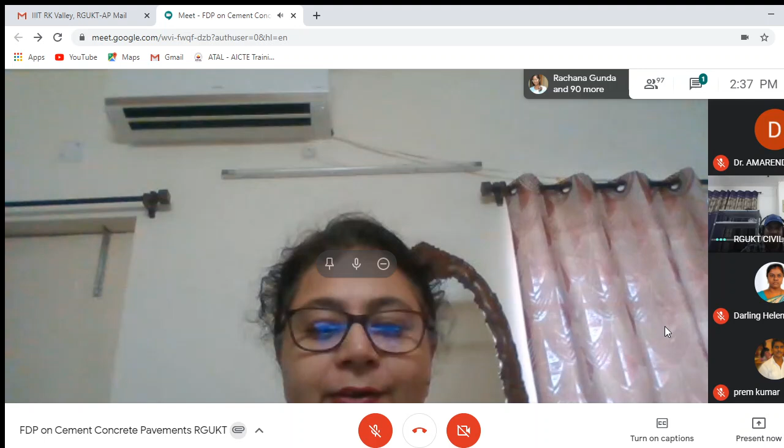Thank you, everybody. First of all, shall I start, Dr. Amarendra? Yes, madam. Okay, first of all, I would like to thank the organizers, Dr. Amarendra and other faculty members here for inviting me to this faculty development program of this institute. I am really thankful to them, and it's my pleasure to interact with them and the other participants. So from my behalf, I welcome all the participants for this session. You have come from different institutes, different backgrounds, so after the lecture, feel free to discuss also. So I will now start my presentation.

Just a moment. Is the screen visible? Is the screen visible? No. Is it visible? Is the screen visible? No, ma'am. Yes, so what is it? Madam, just open your presentation. Just go to present now. Present now, I'm going, right? Then your entire screen, it says. Yes, ma'am, share your screen, ma'am. Okay.

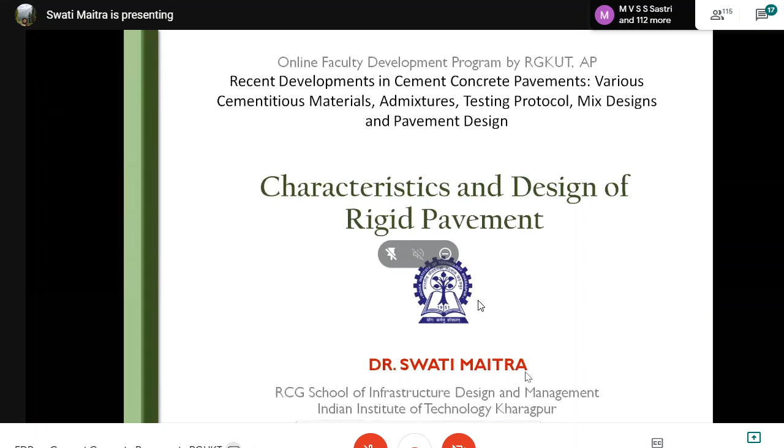Sorry for the delay. So today's topic is characteristics and design of rigid pavement, though I will mainly focus on the characteristics of rigid pavement. And this is just an introduction.

The main component of any road infrastructure is the pavement, and we have bituminous roads and concrete roads. I think this FDP is only on concrete roads, so I'm not going into detail. We can compare construction cost, maintenance cost, durability, and life cycle cost. In recent years there is significant emphasis from the government for the construction of concrete roads in India.

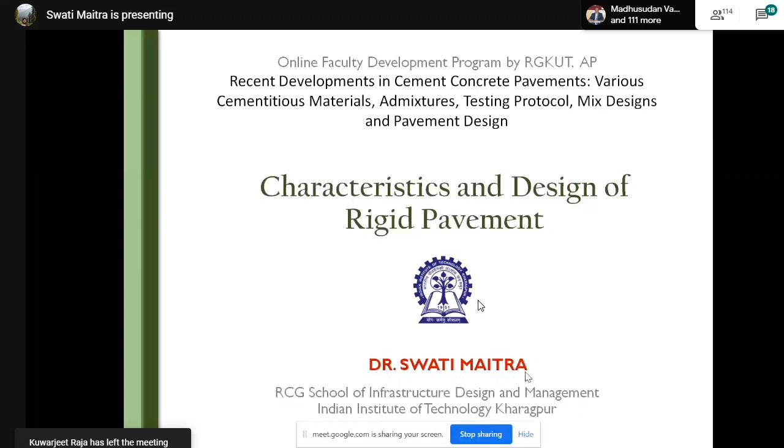We have several types of concrete road: jointed plain concrete pavement, or JPCP as commonly called, and jointed reinforced concrete pavement, though this is not very common, even in India and abroad, becoming less nowadays. In jointed plain concrete pavement, there is normally no reinforcement, and we will discuss those things.

In jointed reinforced concrete pavement, it has reinforcement. Continuously reinforced concrete pavement is another type where we have a continuous, good amount of reinforcement throughout the concrete slab.

Pre-stressed and precast is another type of concrete pavement where you can build the concrete slab in a factory and place it on the site. It could be pre-stressed so that it can take more load, and the thickness requirement is also less.

Roller compacted concrete pavement is also another type of concrete pavement. Cell-filled concrete pavement is normally for low volume roads, village roads, and the like. Pervious concrete pavement is also another type of pavement, comparatively new.

Concrete is generally impervious in nature, but this type of pavement, as the name suggests, can permit water. So for low volume roads or urban areas, this type of concrete pavement can be used. Another type is the concrete overlay or white topping.

This is also coming in a big way nowadays, and this is mainly a rehabilitation measure for existing bituminous roads. So there could be several types of concrete pavement, but the most common type is the jointed plain concrete pavement, used in most of our highways. Our main focus today is on jointed plain concrete pavement.

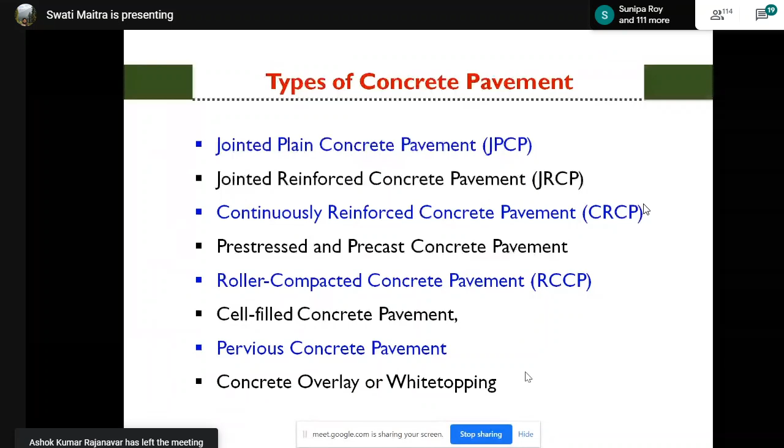Now let us talk about the characteristics of concrete pavement. Concrete pavement is composed mainly of the concrete slab, which has high flexural strength. Concrete is generally a material which can take very high compressive strength, and its tensile strength and flexural strength are comparatively low, but the strength of the concrete slab mainly governs the concrete pavement design.

So it has the concrete slab at the top surface, and below it is the foundation, composed of the base layers, sub-base layers, and compacted subgrade. In concrete pavement, the influence of subgrade is comparatively less than in a bituminous pavement. In a bituminous pavement, it is actually a layered structure, and all layers are responsible for taking up the load, so the thickness also decreases as we go downwards.

In case of concrete pavement, also we have different layers. Is there any problem, Dr. Amarendra?

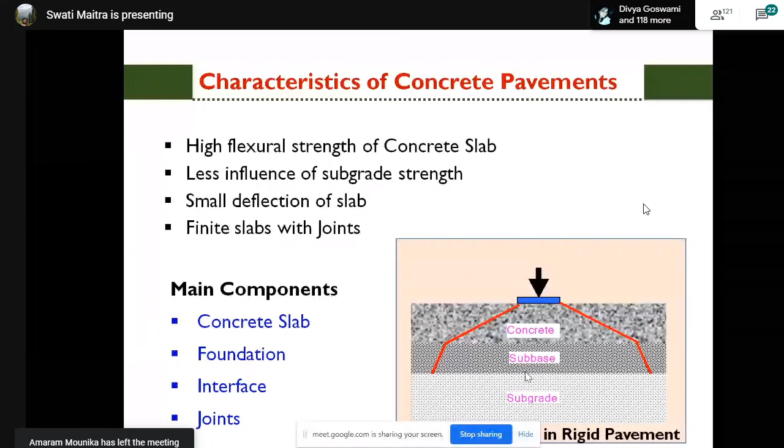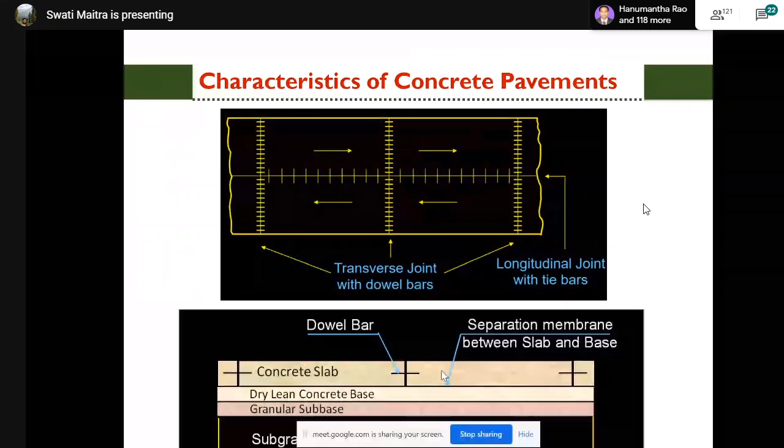This is just a sectional view of the pavement, showing the concrete slab, the dry lean concrete base, the sub base, and the subgrade.

Now, the structural behavior of concrete pavement depends on the traffic characteristics. It also depends on climatic characteristics. The main load coming on the pavement is due to traffic movement. Traffic is the main loading for all types of pavement, so traffic characteristics are an important consideration for the performance and design of the pavement.

Traffic characteristics means not only the load, but also tire pressure, wheel position, wheel distribution, whether it is single axle or tandem axle, and the total load coming on the pavement. All of this matters in developing stresses. The traffic load, or axle load, is the main load coming on the pavement.

Another important factor is temperature variation. Climatic characteristics mainly result from temperature variation and moisture variation. Temperature variation could be daily or seasonal, each having its own effect on the development of stress in the pavement. Moisture variation is also present, but its effect is much less compared to temperature variation. So often in analysis or design, we neglect the effect of moisture, though it has a similar type of effect as temperature.

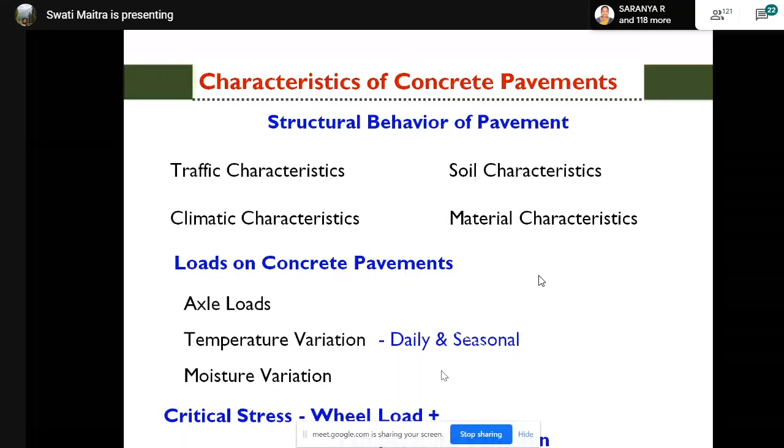Now, jointed plain concrete pavement, as I said, the concrete slab is the main component, main structural component. It is plain cement concrete without any reinforcement, and it is responsible for the load carrying of the pavement.

Foundation is a combination of subgrade, base, and subbase, and the foundation is assumed as Winkler foundation. For all our analysis and calculations, the Winkler foundation model has been assumed, which is a very simplistic model, as suggested by Westergaard, who is considered the father of concrete pavement analysis. From that, we still use Winkler foundation. Of course, in some analysis, elastic foundation also can be used, but Winkler foundation model is still quite popular.

In Winkler foundation, the subgrade strength is expressed by one single parameter called the modulus of subgrade reaction. This parameter can be found out from a plate load test, or it can be correlated from the CBR value. Base and subbase, as I said, are for uniform and firm support for the concrete slab.

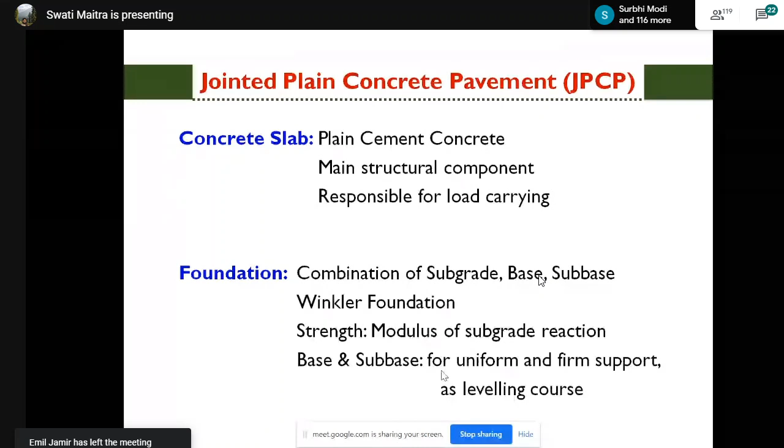Now the interface could be a bonded interface or unbonded interface. Bonded interface means when the concrete slab at the top is cast directly over the base or subbase, we call it a bonded interface. The interface between these two is very rough, and the friction between the two is very high, because the lower layer is, in most cases, dry lean concrete. Even if it is WMM, the friction is quite high if the concrete slab is cast directly over the base.

In case of an unbonded interface, there is a bond breaker in between the concrete slab and the dry lean concrete base. That bond breaker could be an asphalt layer, a very thin asphalt layer, or a polythene sheet, or some other type of polymer material. Generally in India, we use a polythene sheet, a very fine 125 micron polythene sheet, as a bond breaker.

So this interface can also be called a smooth interface. Bonded interface can be termed a rough interface, whereas the unbonded interface can be termed a smooth interface, because it has very low friction.

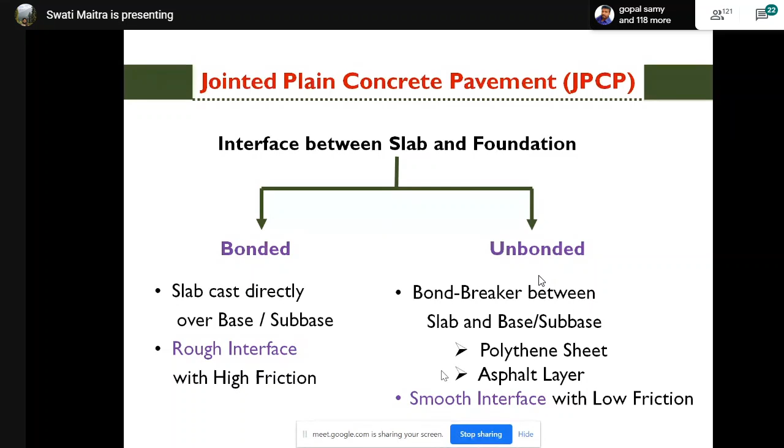Joints are an integral part, and as discussed this morning, there are different types of joints and reasons why they are provided. We'll discuss a little bit here too. In JPCP, we have four types of joints: contraction, construction, expansion, and isolation joints. These joints are provided to control cracking due to shrinkage or thermal contraction, moisture, or thermal variation within the slab. The joints are provided in both the transverse and longitudinal directions of the pavement.

Normally, as we know, concrete is a material whose main ingredients are cement, aggregate, sand, and water. When water is added to the dry mix, hydration of the cement takes place. This cement hydration is an exothermic reaction, so a lot of heat is developed and generated. If we cannot control this, there will be loss of water, and water will evaporate.

Because of that, hydration cannot take place properly. If we control this evaporation of water, then hydration can take place in a proper way, or sometimes we put additional water so it gets sufficient water to hydrate. That is why curing is necessary in all concrete structures. But it is very, very difficult for many structures to control this type of cracking, otherwise shrinkage cracks may occur at random locations, anywhere. So it is very important to control this type of cracking, and proper curing is very much necessary for all concrete structures.

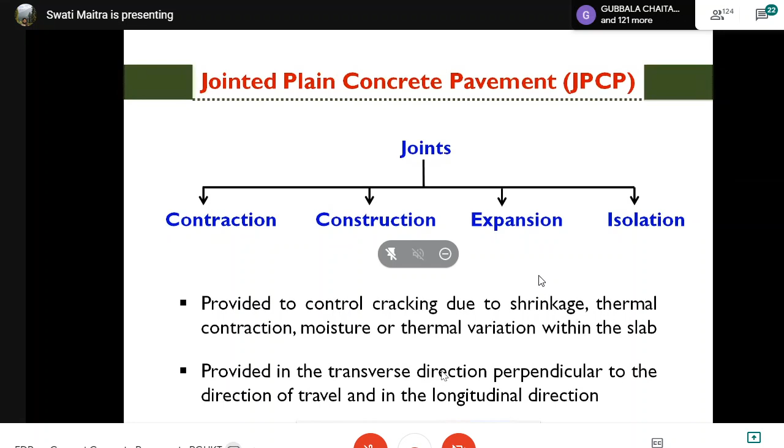So we have contraction joints, to allow cracks due to thermal contraction. We also have construction joints, to separate successive construction activities.

These construction joints - suppose we are constructing the pavement and after some time we have to stop the work, say a day's work is over, so we have to stop it. There we need to provide a full depth construction joint, and we have to provide dowel bars there.

So construction joints are provided to separate the successive construction activities, and expansion joints are provided to permit the thermal expansion of the slab without damaging the adjacent slabs or structure. Expansion joints are not provided in India in concrete pavement, but they are provided near the structures. So that needs to be provided.

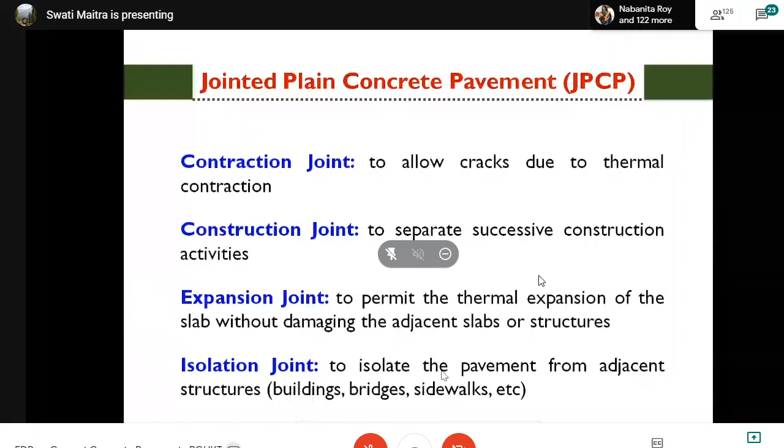Isolation joints or expansion joints are provided only adjacent to the structures. But contraction joints and construction joints have to be provided. These expansion or isolation joints need to be provided when there is an adjacent structure, so for that you have to provide these two types of joints.

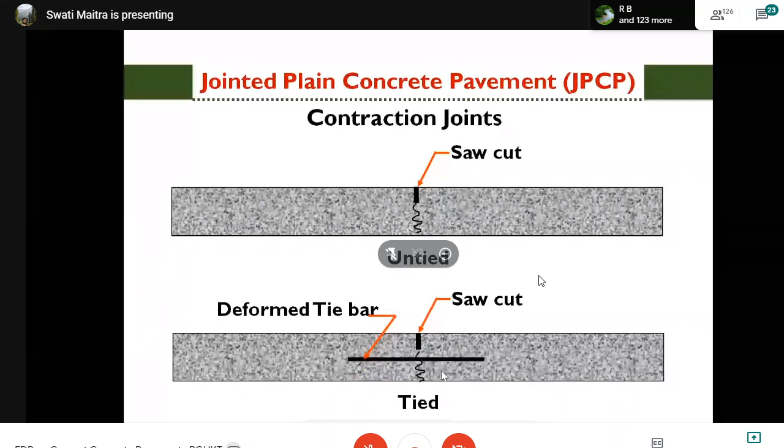In case of longitudinal joint, similar thing - here also we cut it along the length of the pavement, same 1/3 to 1/4 of the slab depth, and we provide tie bars. Of course, the diameter of the tie bars is much less as compared to dowel bars, because the function of the two bars is different.

Dowel bars are provided to transfer the load from one slab to the other slab. However, the function of the tie bar is not that - tie bars are provided to hold the two slabs in their positions, not for load transferring. Here you can see the schematic diagram of the tie bar at the longitudinal joint of the pavement.

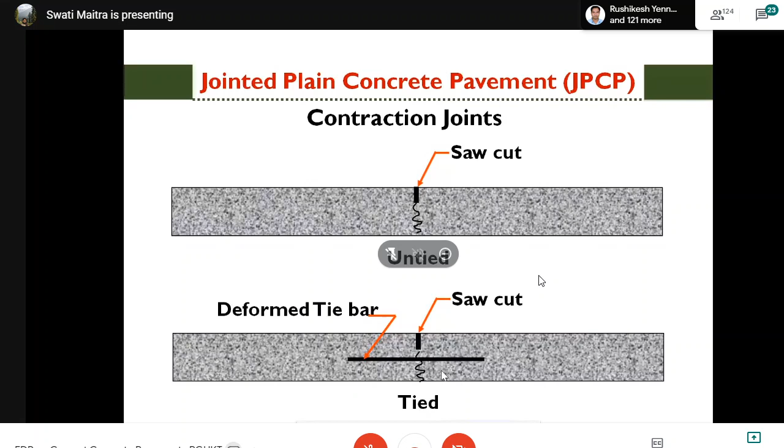After the pavement is constructed, the grooves are cut, and this has to be done within 18 to 24 hours of the pavement, otherwise shrinkage cracks may occur. So this is also very important - we have to cut the grooves with proper depth and within a stipulated time, that means within 24 hours.

Many cases have found that because of late saw cutting, cracks have occurred on the pavement, followed by other distresses. We have seen also in NH 60 that after the groove cutting, when we open that side of the pavement or remove the shoulder portion, cracks have been found below the saw cut location.

So this is good, otherwise it may occur at any other location. We want the cracks to occur only at the saw cut locations - this is the contraction joint created below the saw cut of the pavement.

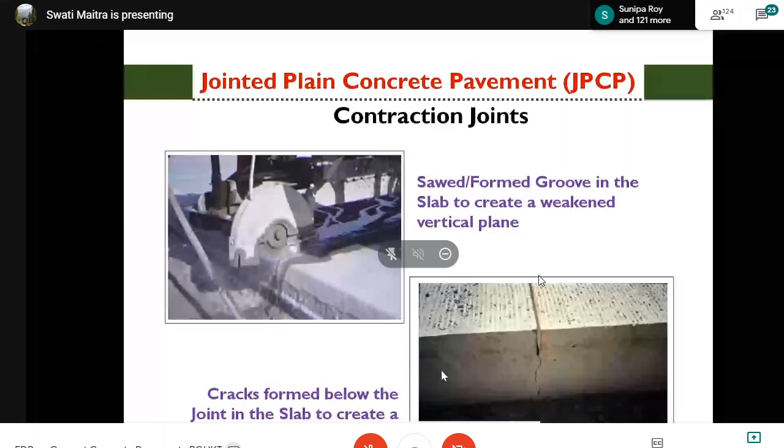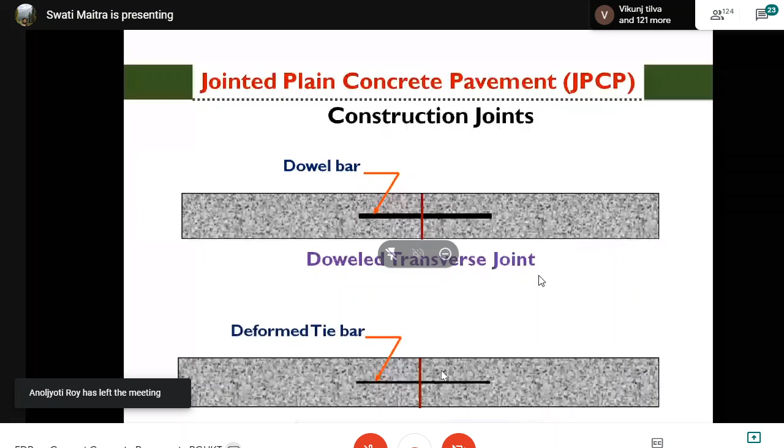Now this is just a picture of dowel bars and tie bars in a construction joint. You can see here, this is a construction joint, and these are full depth construction joints, and dowel bars are there. The diameter of dowel bars are also larger compared to tie bars. Generally, dowel bars are in the range of 32 to 36 millimeter diameter, and tie bars are 12 or 16 millimeter, so a lot of difference based on their purpose. Dowel bars are for load transfer, while tie bars are just to hold the slabs.

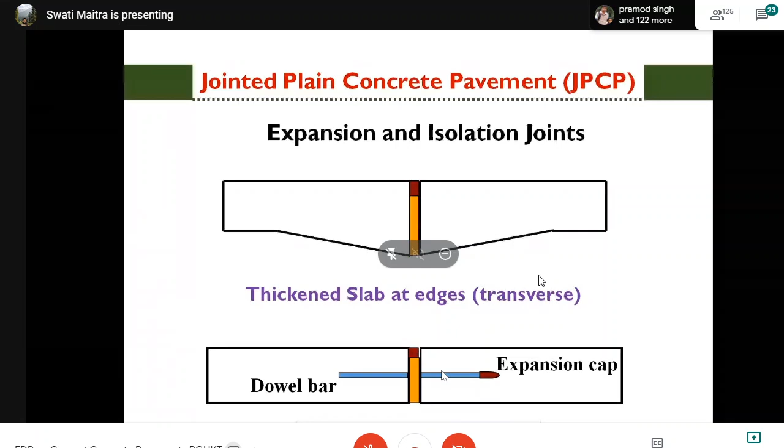This is expansion or isolation joint. This is also full depth, and has a wider gap in between. You can see that sometimes the edge is also thickened, to avoid damage at the edges. So this is the expansion joint and isolation joint in JPCP.

Now, as I said, load transfer is a very important component in jointed plain concrete pavement, because it is not a continuous structure. The slabs are formed because of these joints in the transverse and longitudinal directions, so load has to transfer from one slab to the other. How well the load is transferred actually governs the performance of the pavement. It is very important that the load applied on the slab is shared by the adjacent slab, and this gives the performance of the pavement.

If the load transfer is poor, then a lot of distresses may happen - faulting type of distress, pumping, erosion, corner breaks. I will show you some pictures of several distresses that occur if the joint is not properly constructed, not properly sealed, or the load transfer is not proper. There could be many reasons for distresses, so I won't cover those, but I will show pictures of how joint-related distresses occur in JPCP.

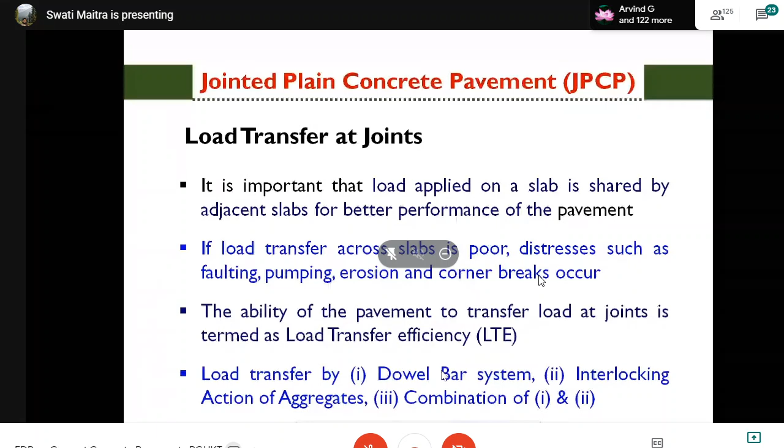The performance of the pavement is expressed by a parameter called load transfer efficiency. Load transfer efficiency is the ability of the pavement slab to transfer the load from one panel to its adjacent panel. This load transfer is done mainly by two mechanisms: one is the dowel bar system, another is the aggregate interlocking system, and in some cases it is a combination of the two.

Load transfer is very important to transfer the applied load from one panel to the other panel. This load transfer is expressed in percentage and can be measured by measuring the deflection of the loaded slab and the deflection of the unloaded slab. So load transfer efficiency is actually the ratio of the deflection of the unloaded slab to the deflection of the loaded slab, expressed as a percentage. If the unloaded slab deflects equally with the loaded slab, then the load transfer efficiency is 100%, which is the ideal case.

But this is an ideal, theoretical case - it cannot happen in practice. When the unloaded slab deflects very near to the loaded slab, the load transfer efficiency becomes high. So it is the purpose of the designer or construction people that the load transfer efficiency should be very high, because that governs the performance of the pavement.

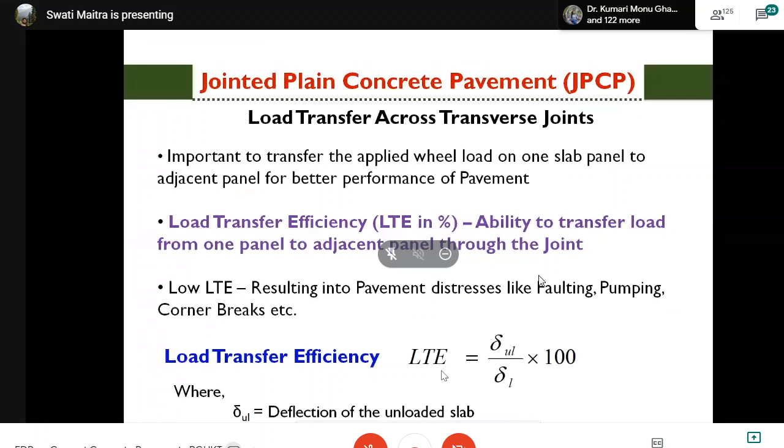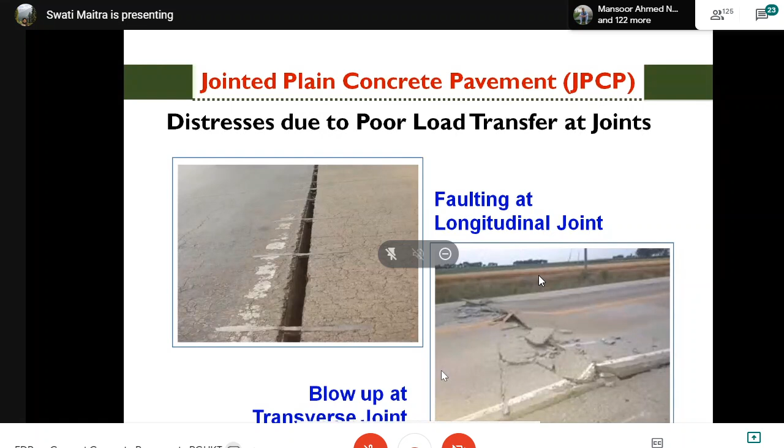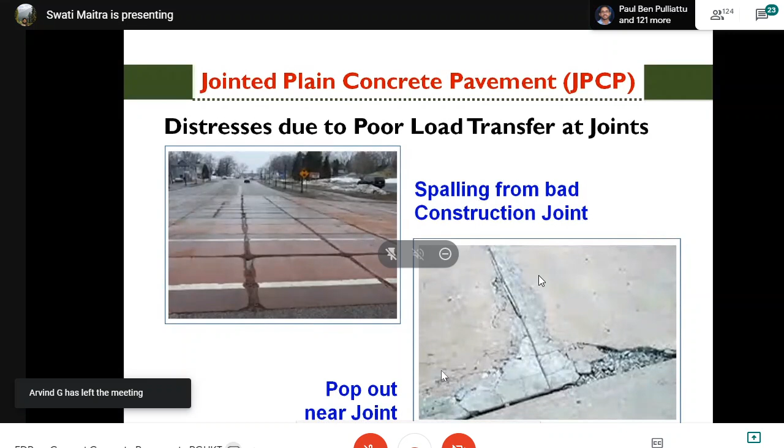These occur in jointed plain concrete pavement if the joints are not properly constructed, treated and maintained. So joints, particularly in JPCP, need to be sealed also, so that water, other materials and dust particles should not go inside and damage the underlying layers. If that happens, it may damage the subgrade, cause erosion, cause voids below the slab, or damage the base and sub-base layers. So it is very important to maintain the joints, and often joints are found to be the main distress areas in case of JPCP if not properly constructed or maintained.

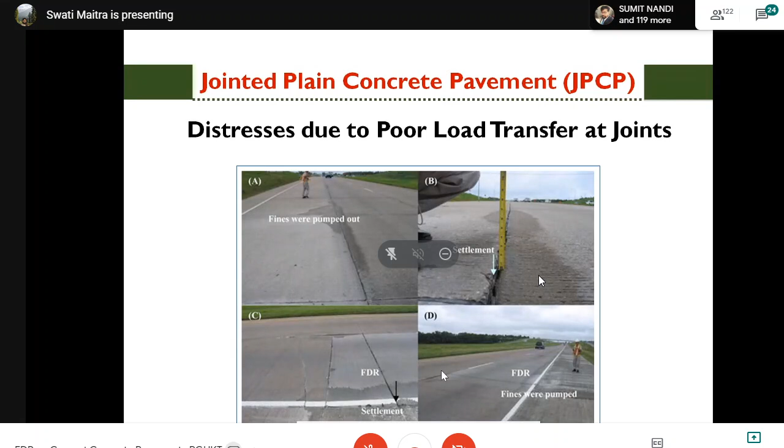Proper sealant also needs to be provided just after construction, both in the transverse joint as well as in the longitudinal joint. So proper sealants need to be provided in JPCP joints.

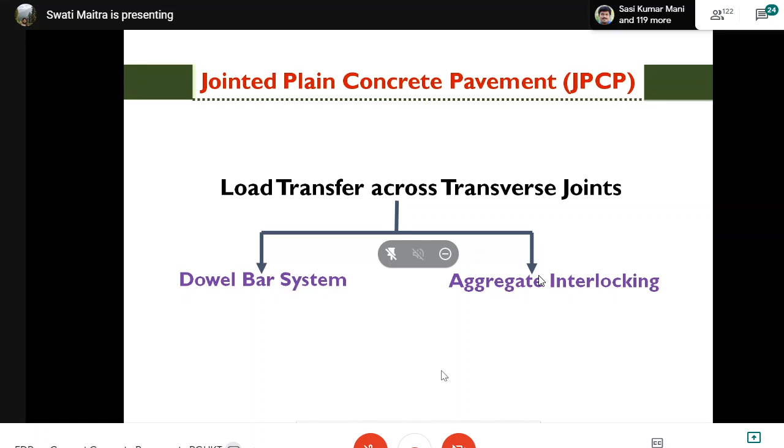Now we will discuss the load transfer mechanism. Load transfer across transverse joints, as I have told, is due to the dowel bar system and aggregate interlocking system, or it could be a combination of the two. In case of the dowel bar system, dowel bars are actually mild steel bars provided mainly for load transfer from one panel to the adjacent panel. They connect the two panels at the mid depth of the slab. Dowel bars have to be provided when the pavement is subjected to high traffic volume, and comparatively the joint spacing is longer. So for all those cases, dowel bars have to be provided in the joint.

Dowel bars allow the adjacent slab to expand or contract also, because in those joints, one side of the dowel bar is provided with some grease or plastic cover, so that it can take care of the expansion. It provides good riding quality by preventing the faulting. If dowel bars are not provided, then only the loaded slab will deflect, the other one will not. So as a user, you will experience a jar from the movement. When functioning properly, dowel bars enable good riding quality also to the users.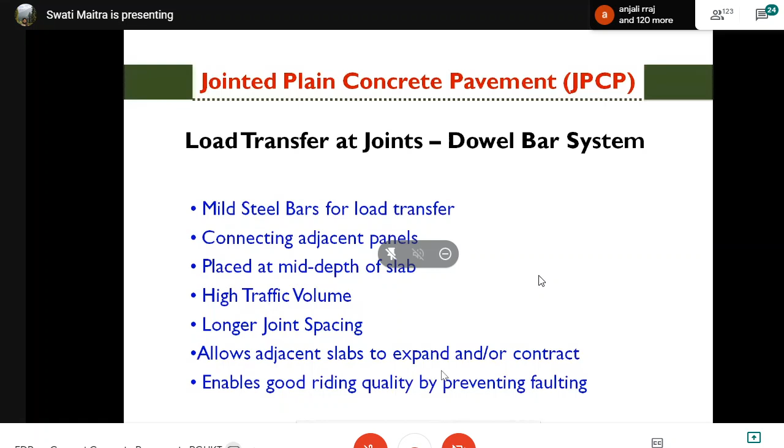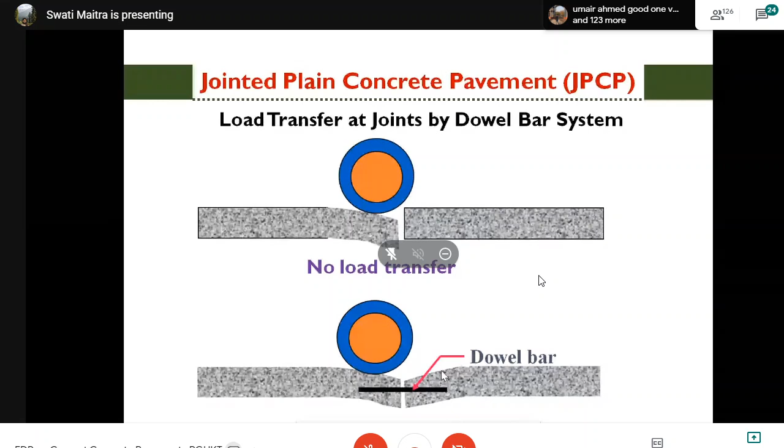Now, on what factors does the performance of the dowel joint depend? The dowel joint parameters depend on these factors: the diameter of the dowel, and the embedded length of dowel. Some portion of the dowel, half, is on the left-sided slab, and another half on the right-sided slab.

So the total embedded length matters for the performance of the dowel. The spacing of dowel also matters, because the dowels are placed at a regular interval across the transverse joint to take up the load. So spacing, diameter, and embedded length of the dowel are important parameters for load transfer. Another parameter is modulus of dowel support, which I will tell a little later, in the next slide.

Modulus of dowel support and dowel looseness are important parameters, which I will discuss in detail. Joint opening also matters in case of dowel joints - it may not be very significant, but still matters. And of course, the properties of the material - properties of steel, since dowel bars are made of steel - properties of concrete, which is the slab, and the strength of subgrade. All these parameters influence the load transfer from one panel to the other panel. So when we go for design or analysis, we will see that the load transfer efficiency depends on all these parameters.

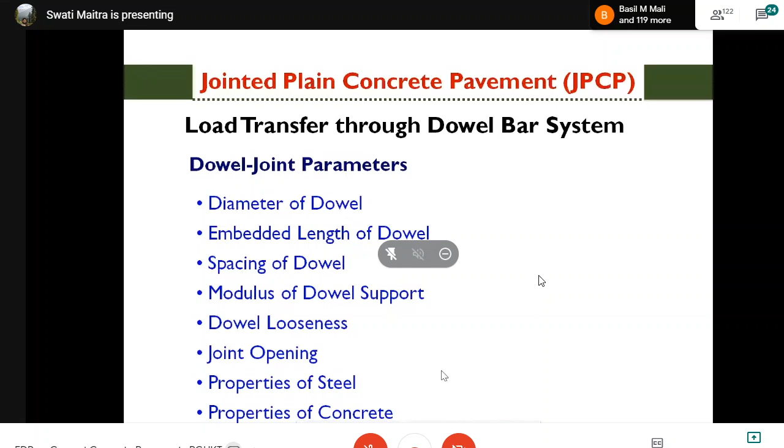Now, what is modulus of dowel support? It is an interaction between dowel and concrete. It's a hypothetical term, but it represents the interaction between dowel and the concrete, since the dowel bars are embedded into the concrete, so the interaction between the two is very important. That is represented by this parameter, modulus of dowel support. A high modulus value indicates a very good contact between the surrounding concrete and steel.

So when the modulus value increases, load transfer efficiency also increases. For our analysis purpose, we have the K value ranging from 80 to 600, which can also be determined from experiment. So this is called modulus of dowel support.

Relative stiffness of dowel embedded into concrete is another parameter, expressed by the term beta. So beta is called relative stiffness of dowel, and all these parameters represent the load transfer due to the dowel bar system. Beta depends on the modulus of dowel support, D is the diameter of the dowel, and E and I are the elastic modulus and moment of inertia of the dowel bar respectively. So this is the relative stiffness of the dowel.

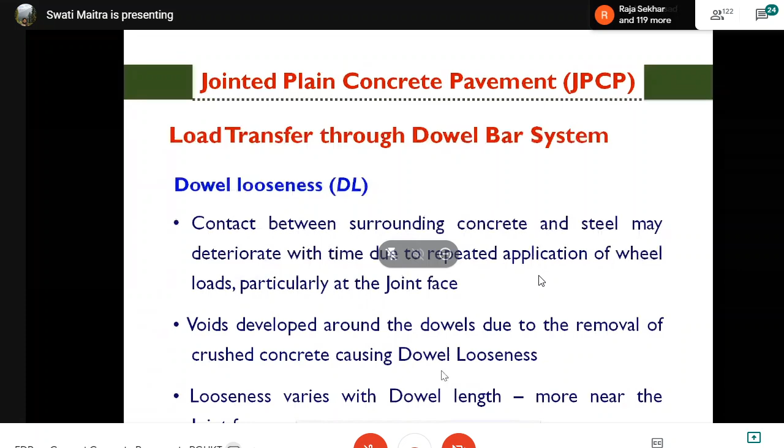Okay, so we have done some modeling. Also, during my PhD work, I have done a lot of modeling on concrete pavement, and all these main components of the concrete pavement were modeled, like the interface, the dowel joint, and the aggregate interlock joint. I will just very quickly show those things as well.

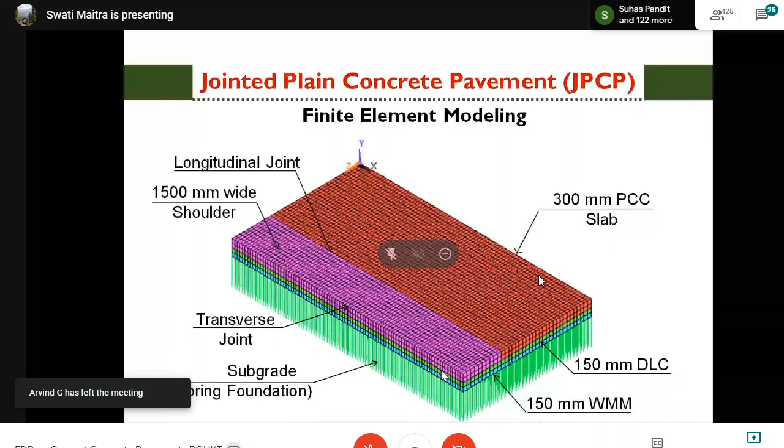So in the finite element modeling, the main components of the JPCP are the concrete slab and the foundation, and the foundation is composed of the base and granular subbase, while the subgrade is the Winkler foundation. The subgrade was modeled as Winkler foundation, and base and subbase were modeled as elastic material using solid brick elements. The concrete slab was also modeled as a solid brick element with linear elastic, isotropic properties.

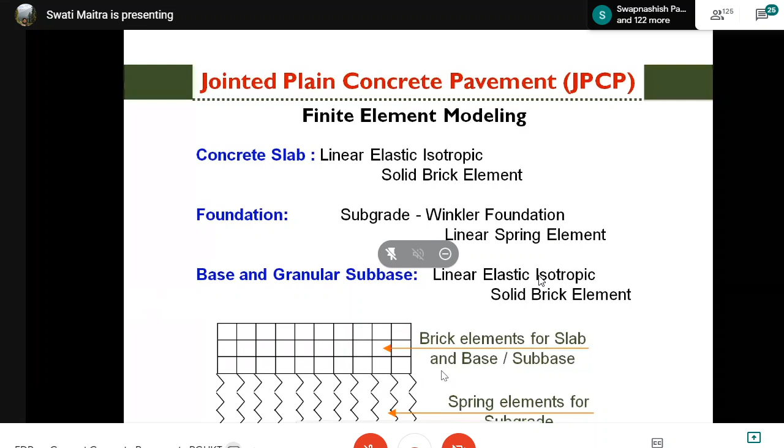So that gap may vary. It may be 0, or it may not be 0, but it may be a few millimeters, and that matters a lot. So this is the gap around the dowel, and that is actually the dowel looseness.

So the beam elements are connected with the concrete slab of the brick element by the contact elements. With this contact element, it was possible to take care of the modulus of dowel support and the dowel looseness. All those things were taken care of by these contact elements, and this was modeled here.

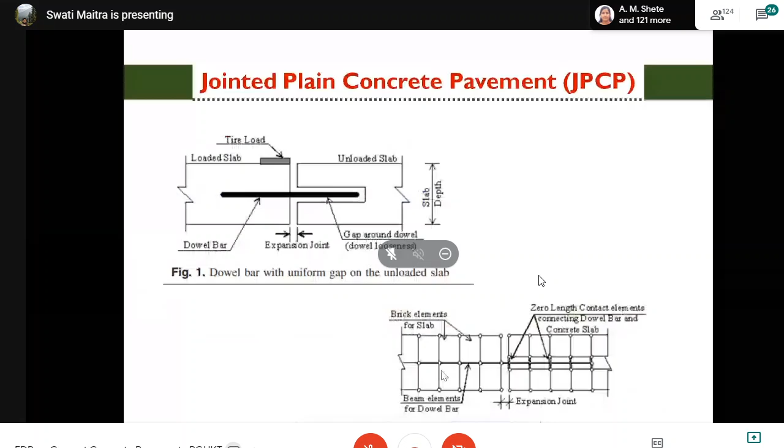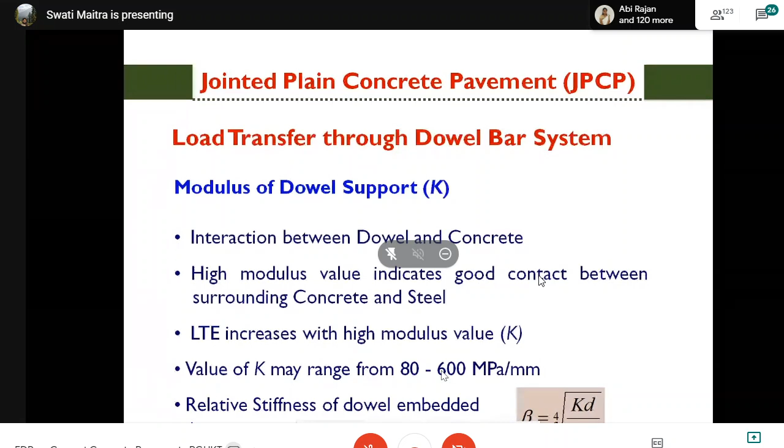So load transfer efficiency depends on all these parameters. Beta also depends on this K value. You can see here that this is the modulus of the dowel support, the diameter, the elastic properties of the steel, and the moment of inertia, that is the area or the cross section.

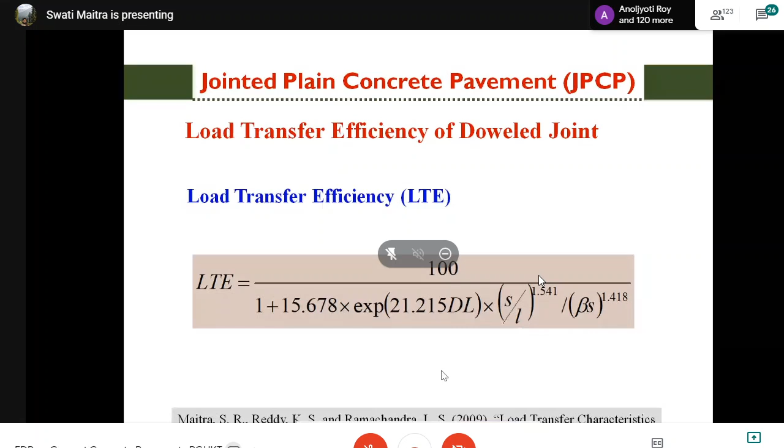So it depends on the dowel parameters. It depends also on the radius of relative stiffness, which takes care of the pavement geometry and the subgrade strength. It depends on the dowel looseness. So all these parameters influence the load transfer efficiency of the dowel joint.

So there are a lot of other things, but let us go to load transfer at joints due to aggregate interlocking. Aggregate interlocking joints are provided when the traffic volume is relatively less, and the joint spacing is also relatively less as compared to high volume concrete roads. So when traffic volume is less, we can avoid dowel bars, and load transfer can be done through aggregate interlocking.

This aggregate interlocking mechanism transfers load due to the interlocking action of the aggregate particles. As shown in earlier slides, we cut the slab at one-third depth, and below that cracks are formed. These cracks help in transferring loads, forming the aggregate interlock joint. The load is transferred from one panel to another due to the interlocking action of the aggregates, so these cracks are joints with irregular faces.

In many cases, particularly in longitudinal joints, we provide tie bars not for transferring the load, but to ensure that the cracks remain tight so aggregate interlocking and load transfer can be done. So tie bars are not for load transferring, but in many cases tie bars are provided so that it ensures load transfer through the aggregate interlocking system.

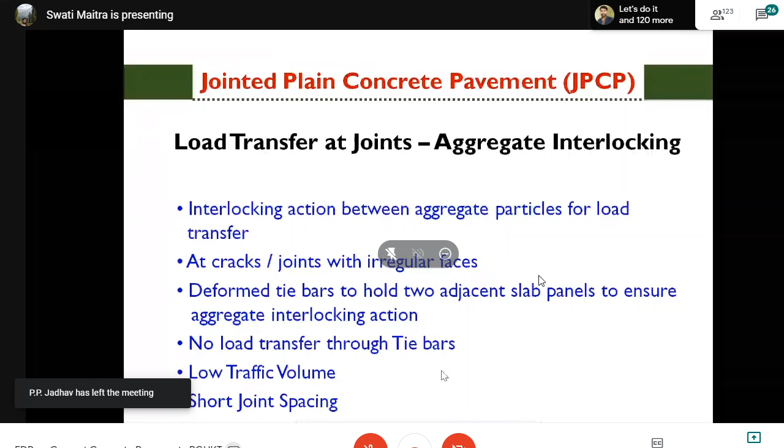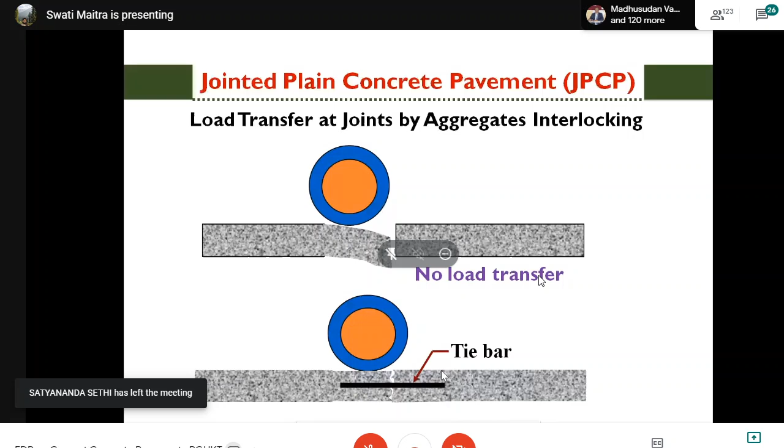So here also, in a similar way, tie bars are provided to help in interlocking action, not for load transfer, but for tying the two slabs in their position so that load transfer can take place through interlocking action.

Now the parameters responsible for aggregate interlocking load transfer are many. One is joint opening, size and angularity of the aggregates, and strength of aggregate, since it is through aggregate only. So aggregate properties are very important, particularly size. If it is very smooth, round aggregate, the load transfer will be less. So size and angularity of the aggregates matter, and strength of aggregate matters too—very soft aggregate will not provide good load transfer.

Joint opening is the most critical parameter—if the joint opening becomes larger, load transfer will drastically reduce. Distribution of aggregate within the cement paste also matters, as it is aggregate interlocking, so all aggregate properties are responsible. Thickness of the concrete slab is also important; if the slab is very thin, it will not get sufficient area at the surface for load transfer, so thickness matters too.

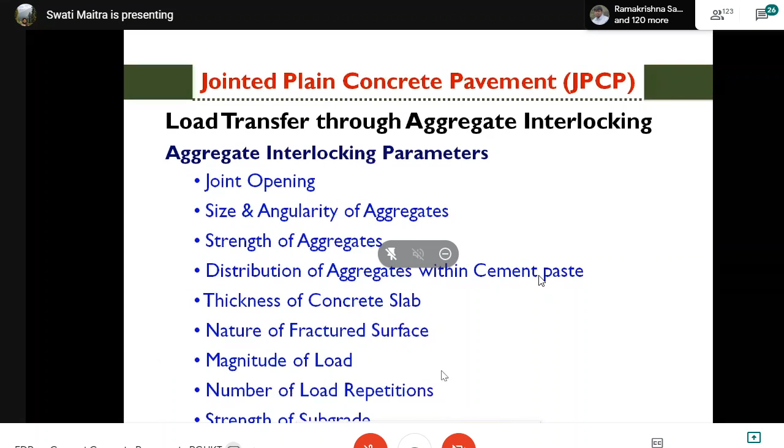Nature of the fractured surface matters—a smooth interface will not provide good aggregate interlocking load transfer, so the roughness of the surface matters a lot. It also depends on the load and strength of subgrade. So these are the parameters: aggregate related parameters like maximum size, angularity, strength of aggregates, and the joint opening or crack width, are very important for the aggregate interlocking load transfer mechanism, along with roughness and other things.

So the mechanism is that irregular faces of crack or joint come in contact, and the interlocking action of aggregate particles helps in transferring the load from one side to the other. Load is transferred by shear spring action, and this is also represented in finite element representation. The aggregate interlocking can be represented by a spring action, as if there are many springs at the edge, represented as a series of springs, like in modulus of subgrade reaction.

So here also you can resemble it as a series of springs. The spring stiffness depends on the nature of the cracked surface—how rough it is—and slab thickness, because you need the bearing area. The nature of the cracked surface depends on the maximum aggregate size, the crack width, the roughness, and the time of crack. Time of crack is also important, because if the crack is formed at a very late stage, the crack width will be more, and there will be a lot of other implications.

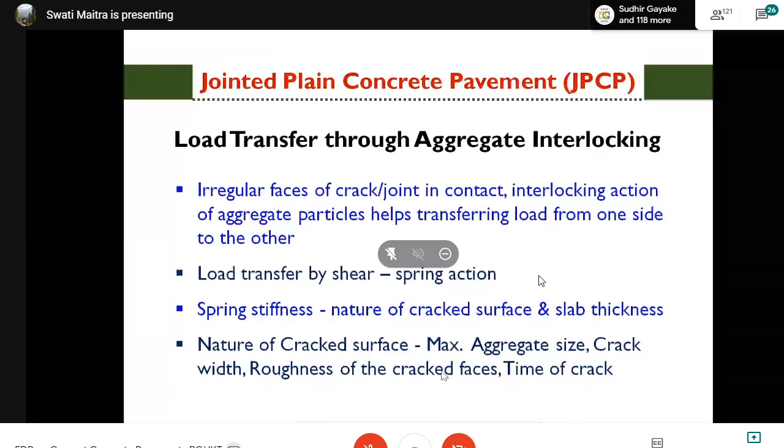With modeling and a lot of other analysis, I have developed a new parameter, modulus of interlocking joint, to represent the strength of the fractured surface. This parameter is a function of the crack width and the maximum aggregate size, which are the two most important parameters for aggregate interlocking load transfer mechanism, as I told earlier.

So these are the two very important parameters, and the strength of the fractured surface depends on these two parameters. Based on that, an expression or a parameter was introduced, modulus of interlocking joint, similar to modulus of subgrade reaction. In this, X is the crack width, and IR is the interlocking ratio which I have introduced, which is the maximum aggregate size divided by the crack width. So this is the expression for that.

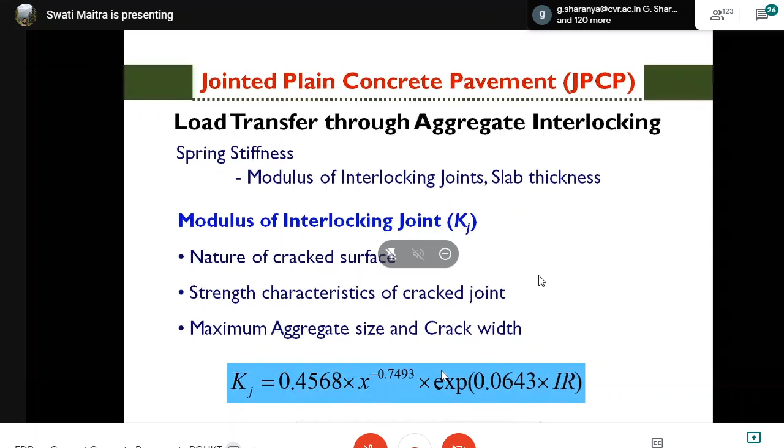Now, this aggregate interlocking, since there is no additional dowel bar or any other mechanism, this load transfer efficiency over a period of time may reduce. Even in dowel bar system also it may reduce due to dowel looseness and other factors. So here also, aggregate interlocking load transfer mechanism efficiency may reduce over time.

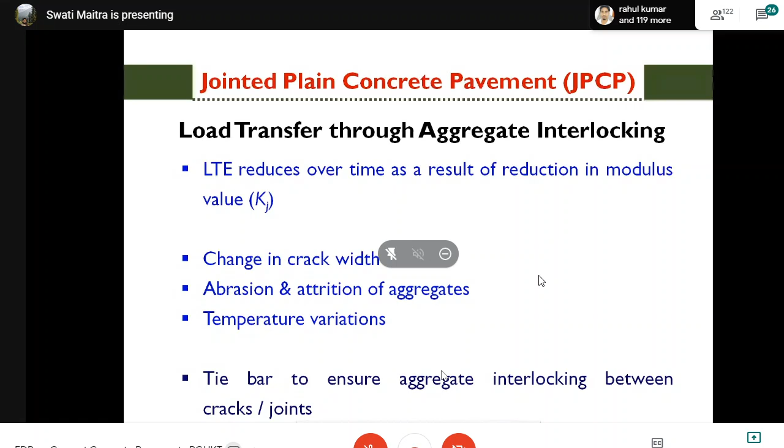What are the factors for that? Change in crack width — initially the crack width is very small, so very good in load transfer. But over a period of time, the crack width may increase, so load transfer efficiency may reduce. Abrasion and attrition of aggregates, temperature variation — all these factors may be responsible for reducing load transfer efficiency of the joint.

So let us discuss about the effect of temperature on concrete pavement.

So this is all about, for the moment, dowel bar system and aggregate interlocking. But there are many more things, many studies have been done also by us, and I will just give a very quick overview of the mechanism of dowel bar system and aggregate interlocking system load transfer mechanism. Now I will go to the effect of interface in jointed plain concrete pavement, which is also a very important component, as I said earlier, particularly to take care of the temperature effect.

So temperature effect is twofold in case of JPCP. One is the daily variation of temperature, another is the seasonal variation of temperature. In daily variation, particularly in daytime or nighttime, this daily variation of temperature effect is seen. In daytime, the top temperature is more as compared to the bottom temperature.

So there is a tendency of the slab to curl downward, that means the middle portion goes up and the sides are at the lower level. While in nighttime, when the top temperature is less as compared to the bottom temperature, the slab curls upwards — the sides go up, whereas the middle portion is at the bottom. So this is the curling effect.

So if there is no restraint, this type of thing may happen. But in practice, do we see this? No, we do not see it, because these curling effects are actually restrained due to many factors. One is the foundation, the adjacent slabs, the dowel bars — so all these are restraining factors, along with the self-weight of the slab.

So all these things actually restrain this curling. If it is free to move, then there will be no stress. But because of all these restraints, the slabs cannot curl that much up or down, so stresses are developed. These stresses we call curling stress.

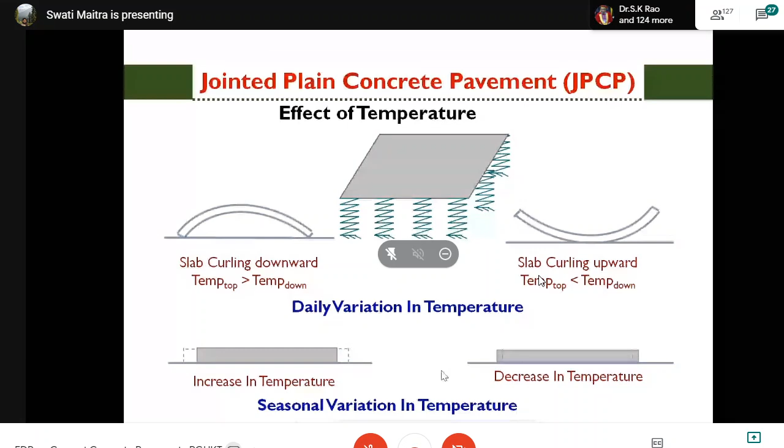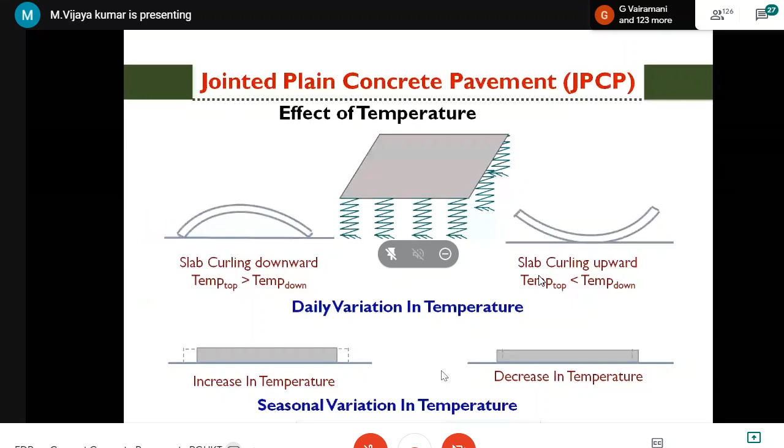And another effect is the seasonal variation of temperature. In summertime, due to increase in temperature, the slab tends to expand, and that is why these contraction joints or expansion joints are there to take care of these things. While in wintertime it tends to decrease — there is a decrease in temperature, so there is a tendency of the slab to contract. So the joints are provided to take care of these thermal effects. This is the seasonal variation of temperature effect on the concrete slab.

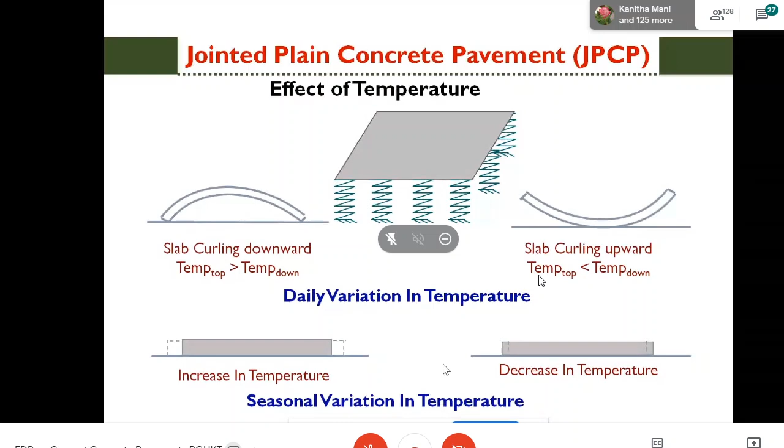As I said, the interface between slab and foundation plays a big role in taking up this temperature effect. This interface is of two types: bonded and unbonded interface. When the slab is cast directly over the base, it is bonded interface, and the friction between the two layers is very high. In an unbonded interface, there is a bond breaker, and the friction between the two layers is reduced. So this is to take care of the temperature effect.

I will tell all this a little later also. Now, we have done finite element modeling of the interface behavior, where the interface was modeled with contact elements between the concrete slab and the base. These contact elements, when there is tension, there is loss of contact, meaning it can take up the curling effect. When the slab tends to curl up or down under high tension, these contact elements represent the loss of contact. Normally in compression there is contact in between, but when there is tension, there is loss of contact. So this takes care of the curling effect.

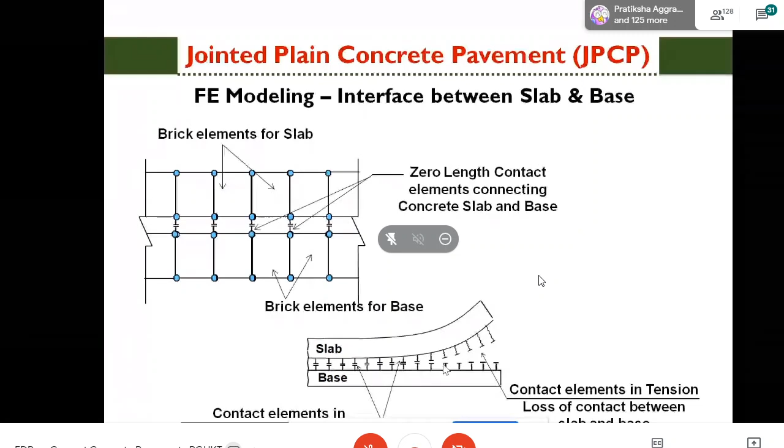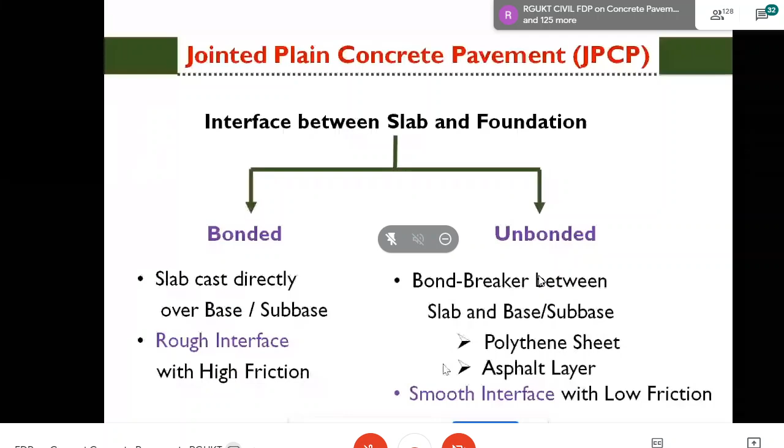With this, the interface was modeled. Also, we conducted a laboratory experiment to understand the friction characteristics between the slab and the base, for the bonded and unbonded interface, to find out how much friction is developed between the layers. Sir has shown one picture of that and said he would detail it more, so I will do that now.

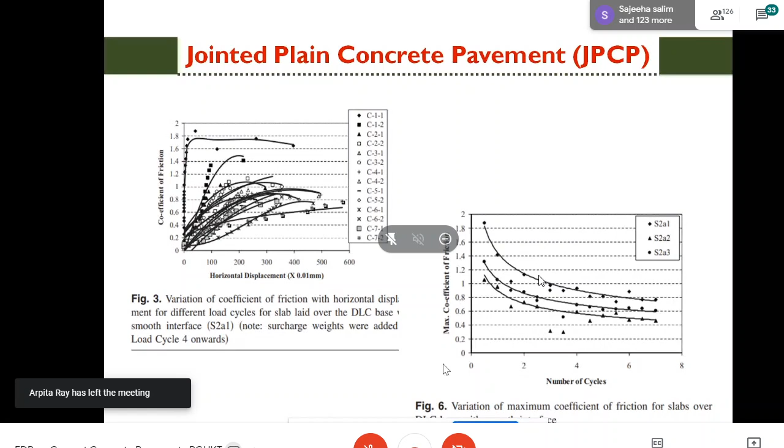This friction value was used in the finite element model to account for the bonded and unbonded interface condition. I'm not showing all those details - you can go through my ASCE paper also on that. From that experiment, we obtained the coefficient of friction for bonded and unbonded interface conditions, for both WMM as well as DLC.

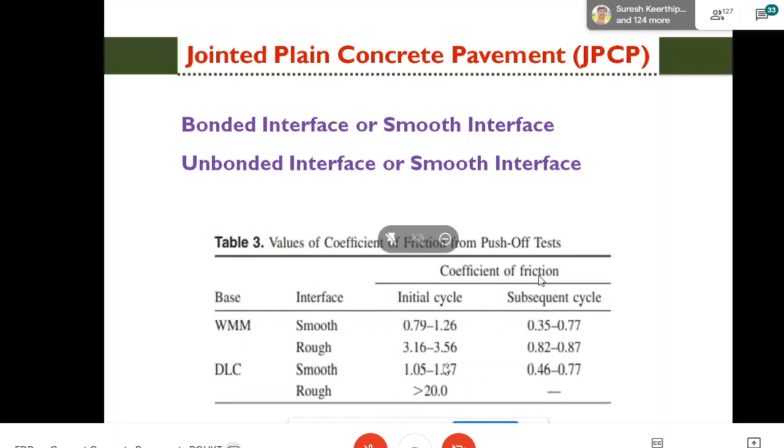We found that in DLC, the rough interface friction was so high that we could not move the slab at all - the friction value was more than 20, so it was not possible to move because it was almost like a monolithic thing. For WMM, we had some value in the initial cycle as well as subsequent cycles, and for smooth interface also we obtained some value, as you can see from this table. This is all from our experiment for bonded and unbonded interface.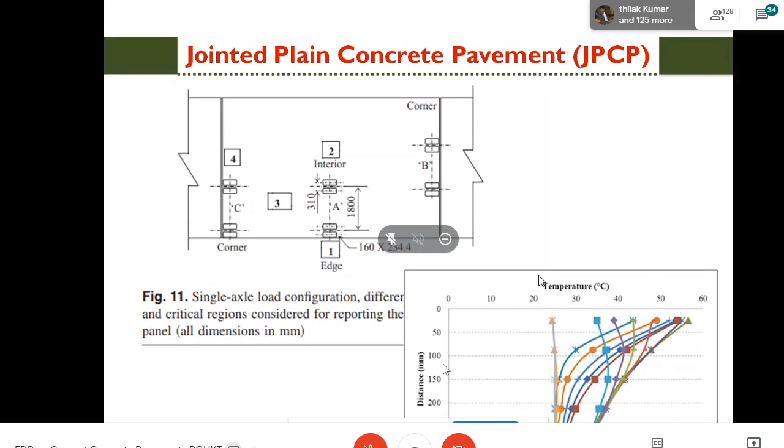Yes, for smooth interface, wheel load at A plus positive temperature gradient is the critical condition. This has been taken up in the code also. It is there for other codes also, that when the load is at the edge with positive temperature gradient, that is the condition where the critical stress is developed.

So here also we obtained results for so many cases, for rough and smooth interface conditions, and we found that stresses are less in case of rough interface condition for only wheel load cases, because in that case the DLC is also contributing in taking up the load, so the stress development is also less at the bottom of the concrete slab. So in that way, the bonded interface is beneficial because the thickness requirement is less.

But if you see the stresses due to temperature effect, then for bonded interface it is actually more. So in that case, to take up the temperature stresses, the smooth interface is beneficial. Both have their benefits and limitations, but for our country we have selected smooth interface for all our JPCP construction, because the temperature variation is significant here, both in summertime and wintertime. So to take care of that effect, smooth interface has been adopted in the IRC.

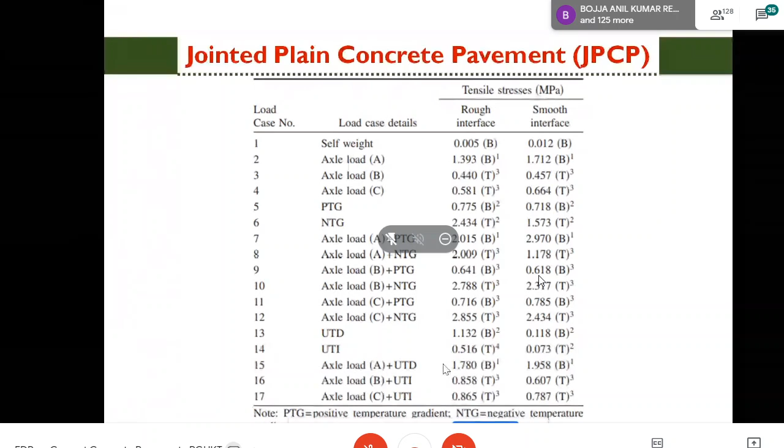This is a few things about jointed plain concrete pavement. Another one - I will very quickly tell in a few slides, only 2-3 slides, on white topping. In recent years, jointed plain concrete pavement is constructed in many places, particularly in highways. It is a very good option.

But in urban roads where traffic volume is not so high, or semi-urban areas, or other places, white topping is another type of pavement which is coming up. This is also good for relatively less traffic volume roads. White topping is a concrete overlay over a distressed bituminous pavement. It is actually a rehabilitation measure for an existing bituminous pavement - it is the concrete overlay. The below layer has to be a bituminous layer, and that is why it is called white topping - over a black top, it is the white topping.

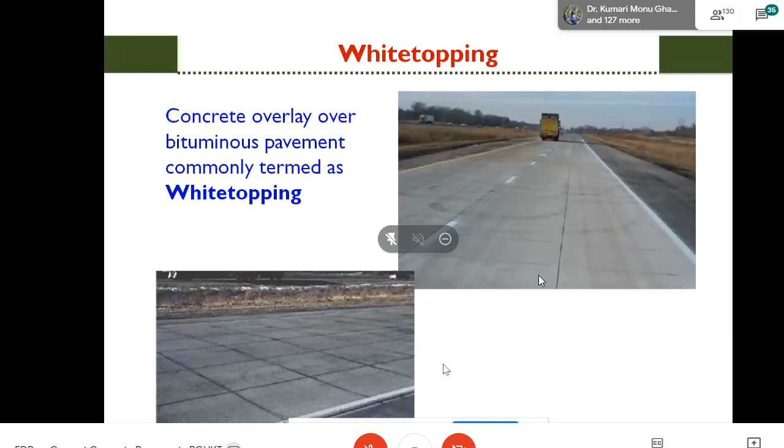Its concrete is more or less whitish in color. So white topping is another thing, and I think more details will be discussed in this course by Dr. Ramachandra, but I'll just share a few words.

In white topping, compared to JPCP, we have lesser spacing of joints, 1 meter to 1.5 meter in either direction - it could be square or rectangular. Thickness is also less. Normally in JPCP we have 250 mm onwards thickness, maybe 250 to 350 or 400 mm also is possible, depending on traffic. But in case of white topping, the thickness is much less, 100 to 200 mm.

For that, we have to have a minimum thickness of bituminous layer, because here the existing bituminous layer acts as the base layer - instead of the DLC, it is the bituminous layer that acts as the base. So a minimum 75 millimeter or so, or 100 mm bituminous surfacing is necessary for the construction of white topping. And subgrade value, this is from the code - it is recommended that more than 15 kg per centimeter square per centimeter.

The same concrete grade, M40 grade of concrete, as used in JPCP is also used in white topping. In JPCP, concrete is normally plain concrete. But here, plain concrete is also possible, but it may also be fiber reinforced. Very fine fibers may be used, or high strength concrete also may be used. Self-compacting concrete can also be used, and these are new things also coming up.

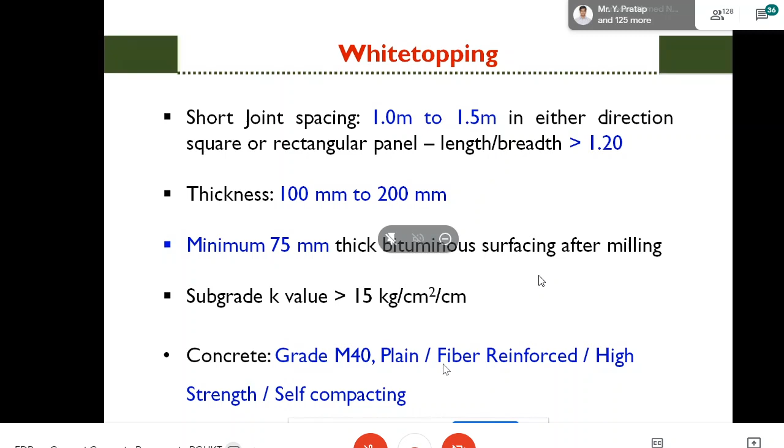So fibers could be steel fiber, polypropylene fiber—very thin and long fiber—or microfibers. They can be used in very small quantity, 0.2 to 0.3%, not more than that.

The interface should be bonded, unbonded, or partially bonded. The existing bituminous surface should be rough to ensure proper bonding, because the thickness is less compared to JPCP. That is why a bonded interface is preferred.

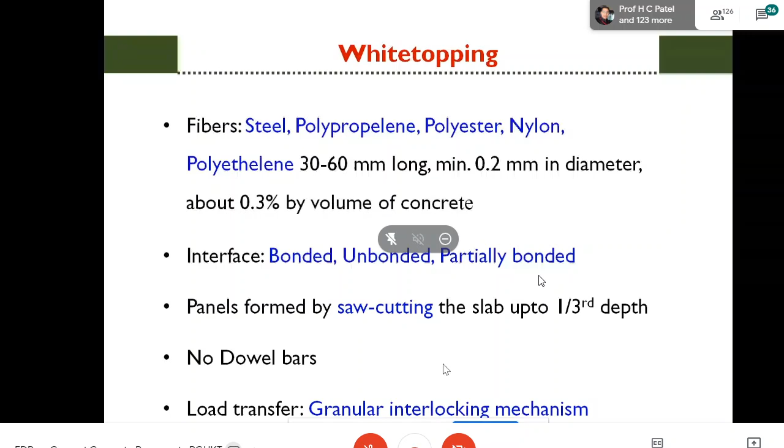Panels are cut by saw cutting up to one-third depth, as in JPCP, but here the joint width is also less. One important thing is that it doesn't have any dowel bar.

So all load transfer is due to the interlocking action of the aggregates. We have done some small analysis, and the work is still going on. This is a 2-panel pavement with aggregate interlock joint, and finite element analysis was done.

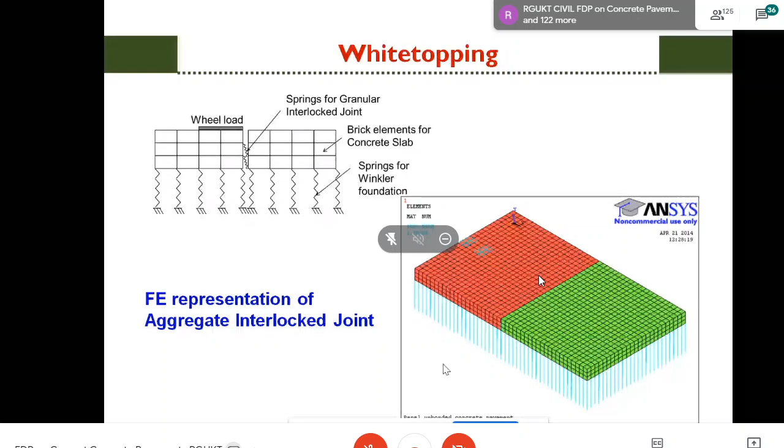This is the pavement, 1.75 by 2 meter. This pavement has already been constructed in Nagpur, and that analysis was done by us. We performed finite element analysis and checked the stresses at different locations.

A, B, C, D are different locations of the pavement and of the wheel load on the pavement. We found out the stresses, and based on that, the design was suggested.

We also checked the stresses with different joint spacing, and found that when we increase the joint spacing, the flexural stress actually increases. We compared this flexural stress with JPCP stresses, and it was quite less.

Because of these smaller panel sizes, the temperature stress is much less, so the total combined stress is also less.

That is why whitetopping is becoming popular nowadays—the joint spacing is less, no dowel bar is required. But if you go on increasing the joint spacing, the stresses also increase.

So this was a small work done for the Nagpur road. This is coming particularly for moderate to low traffic areas, and it is a very good option for urban roads. In urban roads we do not have so many commercial vehicles, but it provides a very good service life and smooth riding.

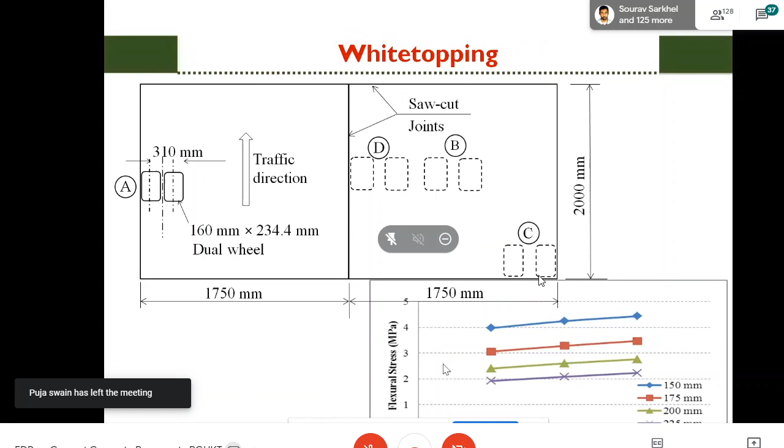But more work is now going on, and we will share more once we complete those things. So that's all for today. I am closing here, and I will be happy to answer some of the questions if you have.